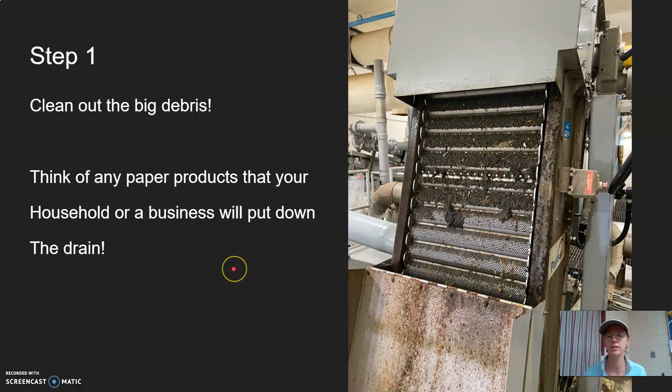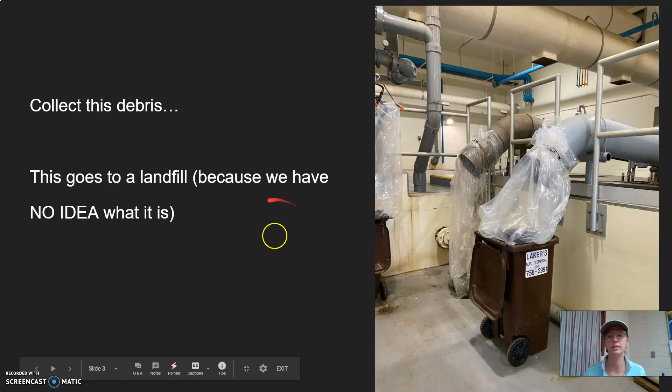We don't really know what any of that big stuff is, and we don't really want to deal with it, so it actually goes to a landfill. It comes out this pipe, the local disposal company picks it up, it gets bagged up because we don't know what it is, and goes to that landfill. There's a picture of some of that landfill debris.

The next step is collecting the next size chunky stuff. So step one got rid of the big chunks. Step two is going to get rid of the medium sized chunks, and step three will be to get rid of the tiny, tiny chunks.

We need to coagulate or stick together the biological macromolecules in all this water. So use your imagination: what is going down your toilet or kitchen sink? Even your food disposal grinds up food, but it still goes down your sink and ends up here, and it's pretty small, all that stuff that gets flushed or washed down. So we need to stick it together so it can basically be raked off.

There's a big tank here, about 20 feet deep. They dump in chemicals, and sometimes these chemicals change depending on the type of water coming in. They test what comes in every once in a while and change the chemical formula that goes into this tank. The chemicals used are called ferric chlorides, and they coagulate this organic material until it gets chunky. Here's some chunks that are floating.

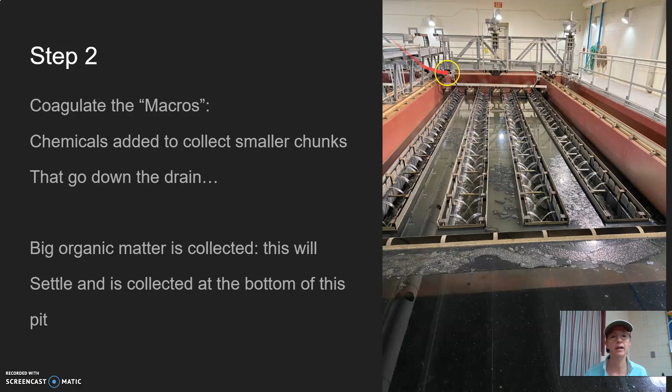Other chunks sink to the bottom, and as it goes down this little stream, the floaty chunks get raked off. The chunks on the bottom go through a filter down there, and the water that comes out the end is pretty clean.

There's some chunks if you want a closer look at what's getting picked up. Nasty. Anyway, the water that comes out the end is pretty clean, still a little cloudy because there are still smaller organic compounds or pathogens in there, but all of the big stuff is gone by the end of this step.

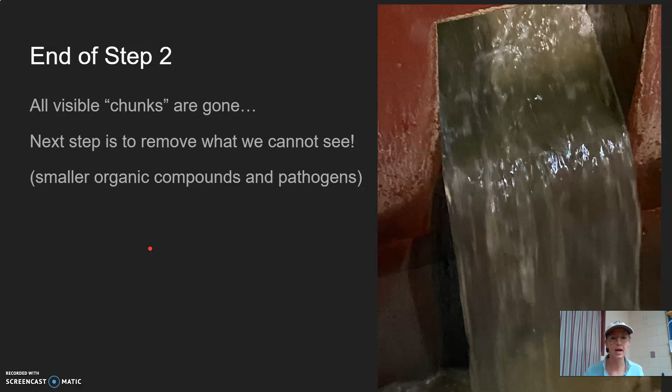So we raked out the really big things, coagulated the next size of molecule and junk, and raked all that stuff out. Everything that got raked out here, I'm going to talk about again at the end. This doesn't go to a landfill, so be asking yourself: what happened to all that nasty stuff that they took out of the water?

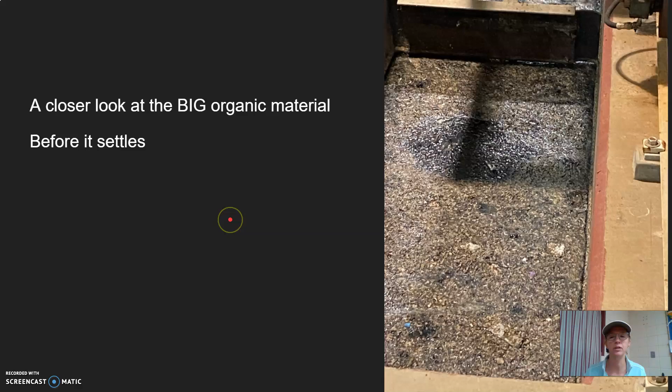The next step: this pretty clean water goes into this holding tank, and each of these are big pipes that go down and then pump up into a swimming pool over here. On this side, there are 4 big swimming pools of water. The water that's still dirty here goes down this pipe into whichever pool they want to fill.

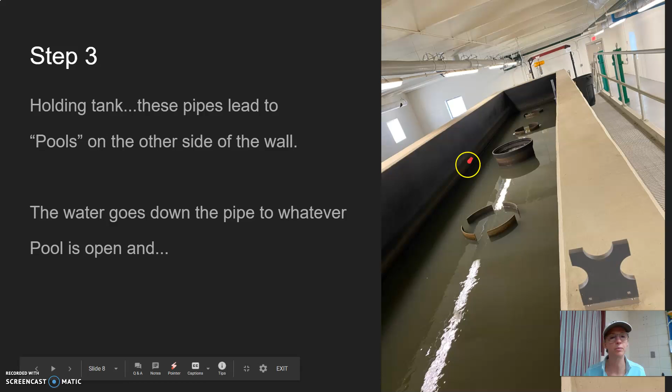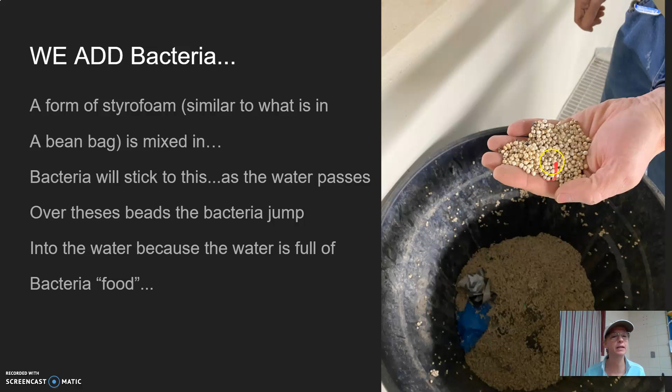When it goes down that pipe, it passes through a tube full of styrofoam beads, similar to what you'd put inside a beanbag. Bacteria like to stick to these beads, so there's a lot of bacteria living on them right now.

So there are no styrofoam beads in this pool. The water passed through a pipe holding those beads. There's a screen at the top that doesn't let the beads in, but all the bacteria on those beads jumps into the water because this water is full of bacteria food. So the bacteria jumped off the beads into this water and starts gobbling up all the other tiny organic debris that you flush down your toilet or sink.

In order to help this bacteria eat up all those bad guys or compounds, they actually aerate these tanks, that's why it's so full of bubbles. They pump oxygen into this tank, giving the bacteria lots of food that you flushed, lots of oxygen, and it's nice and warm in this room. It's a perfect environment for the bacteria to get nice and chubby, and it gobbles up anything else that was really tiny and didn't get raked out before.

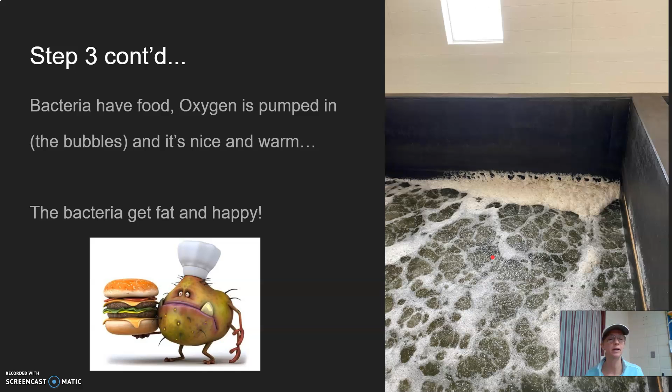Then we need to get rid of this bacteria, so what do they do? They cut off the oxygen supply. Here you can see the water level going down. There are still bubbles, but that's just leftover foam, they stop giving the bacteria oxygen and the bacteria panics. It doesn't have any air to breathe, but it wants to live. So any bacteria in here that ate all the food now starts eating each other, bigger bacteria eating tinier bacteria.

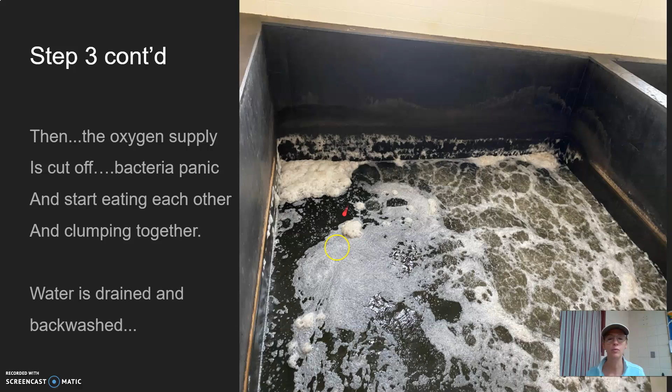They end up clumping into colonies, so we can't see them, but there are big colonies of bacteria in here, and all that bacteria ate up anything else that you flushed. You can see the water level going down. It goes down another pipe, and at the bottom of this pool it gets filtered and backwashed. What happens to all that bacteria and organic matter, we're going to find out in a minute. But the water that comes out of here is really pretty clean, though it gets filtered again.

So the water is going to go through these tubes. As it goes through here, they're full of teeny, tiny glass capillary tubes, that's what they're called, about 0.01 microns in diameter. The water goes through here, and anything too big to fit into these tubes ends up out here and gets filtered again.

Inside these tubes that the water is passing through, this would be a new one of these filter systems, so I'll show you a cross section. There are 1,000 glass tubes inside here running up and down. The water goes through here. They're really, really small, so water molecules can fit inside, but the bacteria that didn't get filtered before won't, so the bacteria will collect in all these empty spaces.

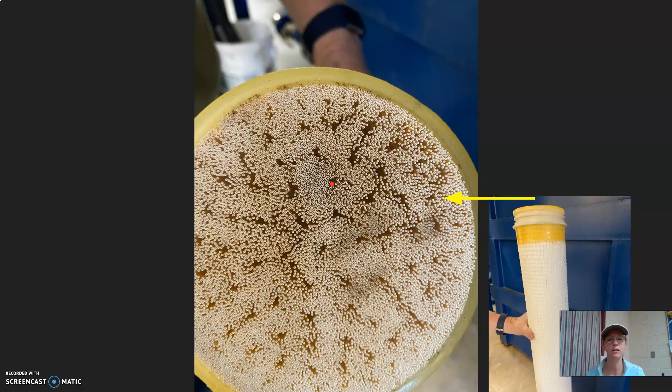If you look at this tube, there are holes on the side. All that dirty water comes out here, and again we can collect that. So the only stuff that makes it through this tube are water molecules, or bacteria that's just super tiny, and we're going to clean it one more time. By the time the water gets through here, it's going to come out the other side.

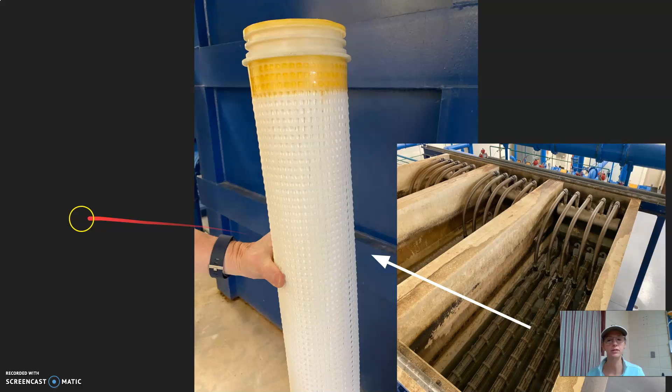The last step, which I didn't show you, I apologize, I should have taken a picture. Right here there would be a channel of water running through, and in that channel they have lights like this hanging above it. These are UV lights that shine on the water, so any teeny tiny bacteria or pathogens still in the water get killed by these really strong UV lights. There's also mercury in here to help activate that, that's what those little black dots are.

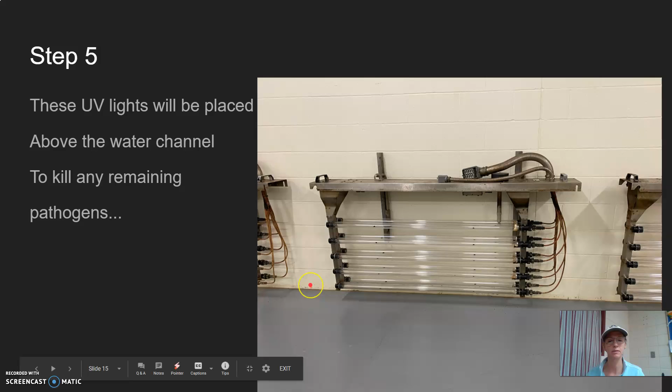So the mercury and the UV lights are going to kill any bacteria that's left. If it doesn't kill the bacteria, the light will make it infertile so it can't reproduce, and bacteria only lives for about 24 hours. So by the time the water leaves the water treatment plant, this is what it looks like.

It is super clean, basically drinking water quality, but nobody's going to drink it. This water goes down a pipe and gets dumped into that stream right by our living lab, and then nature can use it and keep cleaning it for us. Some of this water will eventually go down through the earth, end up in an aquifer, and get pulled right back up into our wells and could end up back in your house.

But we have a really good water treatment plant that keeps it clean.

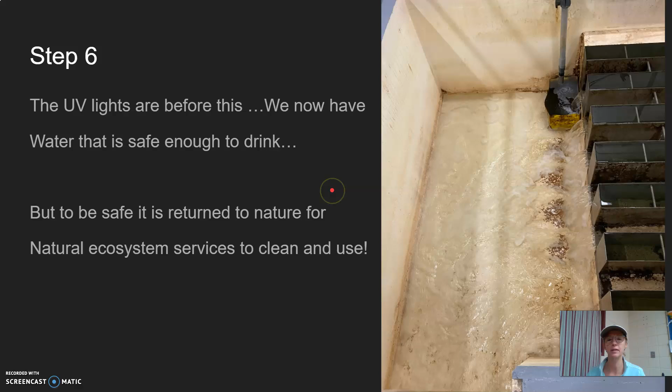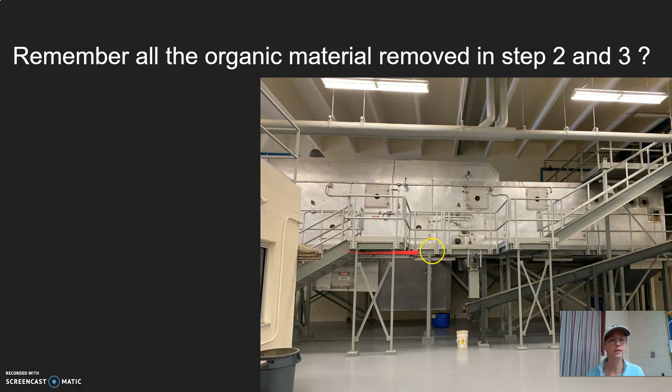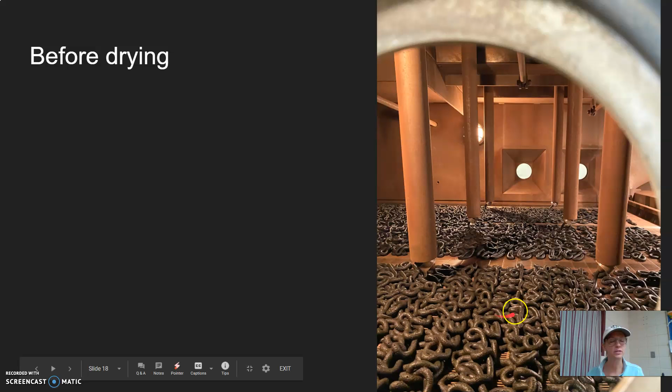Then they bag it up, and it can actually go to a farmer's field. Our wastewater plant has a relationship with one of our local farmers. This farmer drives his truck over, and the people at the plant will dump this bag into his open semi, basically, and he takes it to his field. The people at the plant are testing this water throughout, and they test this product at the end. They tell the farmer which chemicals he has to add to his field.

The farmer is talking to environmental people to make sure he applies it in the right concentrations. Also, since this is human waste, it gets treated differently than cow manure - this farmer gets special clearance from our EPA for which fields he can put it on and in what concentration. But it's perfectly safe.

So really, some of your human waste is going to fertilize a farmer's crop.

It is not my husband, I will tell you that.

But it's perfectly safe - good stuff in here. It's free fertilizer for the farmer; he doesn't have to pay for it because he's doing a favor to our water treatment plant by getting this out of their hands. These bags, if you stood next to one, are probably about 8 feet tall, maybe 4 or 5 feet wide, and this is enough for about 1 acre of farmland. It takes a couple months to make about 100 bags of this - I think that's what the guy told me. But anyway, free fertilizer for the farmer, and the wastewater plant gets rid of all their organic waste for free also - a nice little symbiotic relationship there.